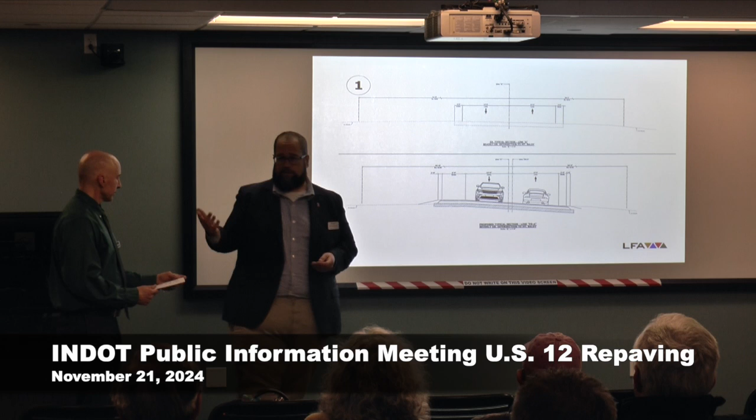So I'm going to stop here, and I'm going to let Dan take over and walk you through the finer points of this. And then again, like I said, the project team will be here as long as we need to at the end of the night. So Dan, okay. All right, thank you, Adam. Yes, my name is Dan Noguero. I'm with Lawson Fisher Associates. I'm the project manager. We are the designers for this project, so we appreciate the opportunity to come out here. Most of you have already looked at most of this, so this will make it pretty clean to understand, hopefully.

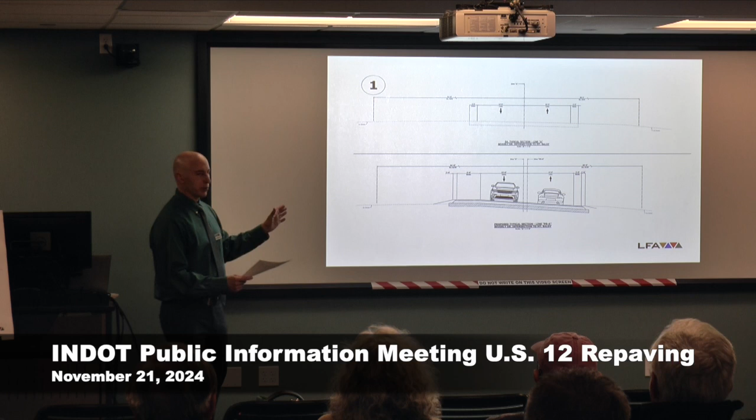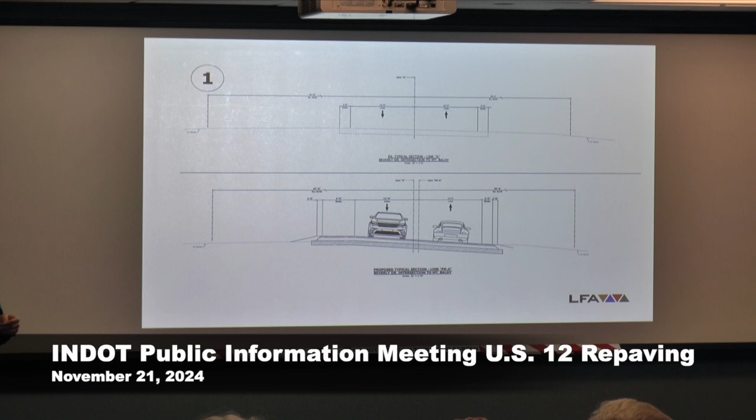So while this is designated as a pavement project, there are some activities that are technically not pavement. So in addition to addressing the pavement, the US 12 corridor as a whole is receiving improvements. Lane configuration and drainage improvements are the most significant and will be highlighted in this presentation. The next 20 slides are the same plan prints that are lying on tables along the sidewall and at the back of the room. The first 4 slides are displays of traffic lane conditions and proposed changes. The top images of each are the existing conditions, and the bottom image is the proposed condition.

The 4 section slides will be revealed from west to east along the project. Projects are typically laid out from west to east from beginning to end. The project begins on the county line west and ends at the state line east. This particular section is the horizontal curve at the west end of the project at the Beverly Drive intersection. A 6-foot shoulder is proposed on the north side for bicycles for connection from the National Park to Beverly Shores.

The reconstructed road will be super elevated, or sloped or banked, with both lanes. The existing condition is the dashed line underneath. It's a flatter condition; the super elevated road will be banked. While the existing road is super elevated, it's not fully super elevated as desired due to the 2 Beverly Drive connecting roads. And I will speak on that more in a few minutes.

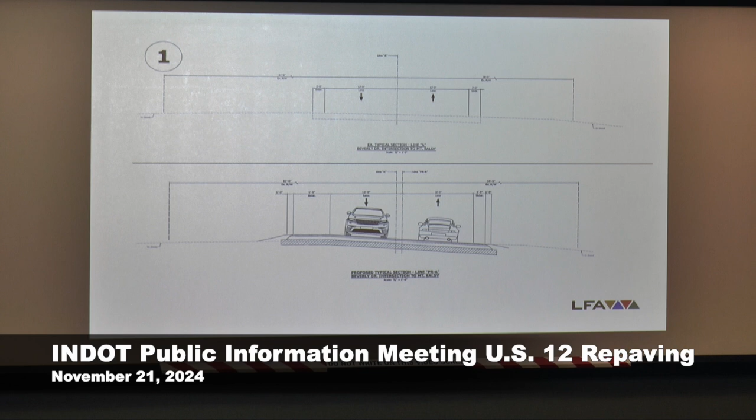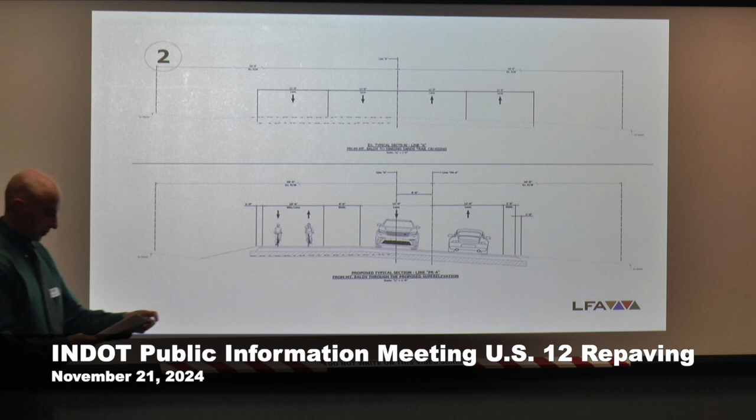This section is just east of the one just shown. This is where the 2 lanes around the curve open up to 4 existing lanes. The current proposal is to hold the 2 lanes from the west and not have 4 lanes. A bicycle lane is on the north side for connection to the national park. Again, the roadway is super elevated from the existing, which is flatter, super elevated and banked through the curve with new pavement. The existing road is not super elevated here. The lanes are also shifted to the south as part of the new alignment.

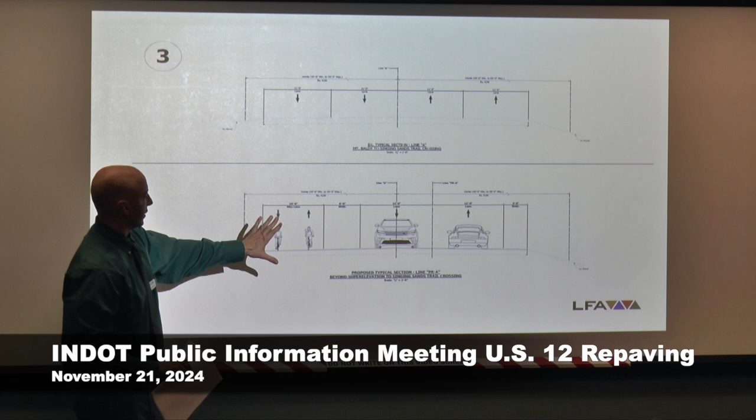This section is again just east of the one shown. This is similar to the previous slide with a 10-foot bike lane and 2 vehicular travel lanes. Well, this is proposed from Mount Baldy approach to the Singing Sands Trail to connect the trail to the national park. One thing to note about this condition is the reuse of the existing pavement. There is no new pavement in this area. The plan is to right size the corridor using the existing pavement to reconfigure lane assignments. So you have a 44-foot existing roadway. It's still going to be 44 feet. You're just going to have a 10-foot lane, some buffer, travel lanes, and a shoulder.

We also have the easels here to my right, your left, that will show the sections just discussed and connect them to the plans as we move through the project limits.

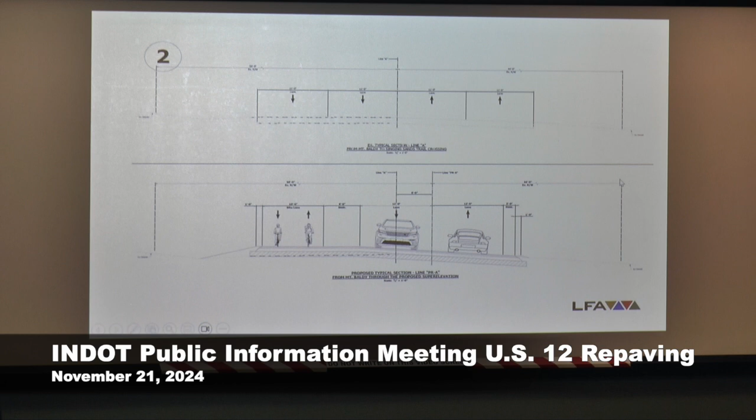Can I ask a question while you're doing that? There we go. Okay. It's working now. Back in business. My tech guy. All right, very good. Thank you.

All right, before we work through the project from the west limit to the east limit. Sorry, there was a question? Do bike lanes have to be in traffic? Can't they be separate and safer, like through the wooded area, away from traffic? They can be. In this case, they're reusing the existing road to try and get the 4 lanes down to 2, so there's still adequate space. There is a buffer between.

Bikes are not consistent like cars are, and now they're cutting down car lanes for something that might not even hardly get used. Yes, the plan is to reuse the existing pavement. The desire is to get down to 2 lanes, since you have that adequate space to connect from the Singing Sands Trail to Mount Baldy. It seemed to make sense to use that space for a bike lane.

Yeah, I understand that whole trail thing is nice. I just don't like bike lanes when they're in traffic and you're trying to turn right and then all of a sudden a bike comes up next to you and they don't stop at stop signs and follow traffic rules. Yes, we can walk through there; there wouldn't be any right turns along this stretch that we're talking about.

No, for me, like in Michigan City right now where you've got bike lanes and I want to turn right, but there's a bike lane and all of a sudden somebody will come whipping through the stop sign on a bike, and you're trying to turn right after you just stopped. You know, stuff like that happens. Yes. I don't have a solution for that. We can chat a little bit more about that after.

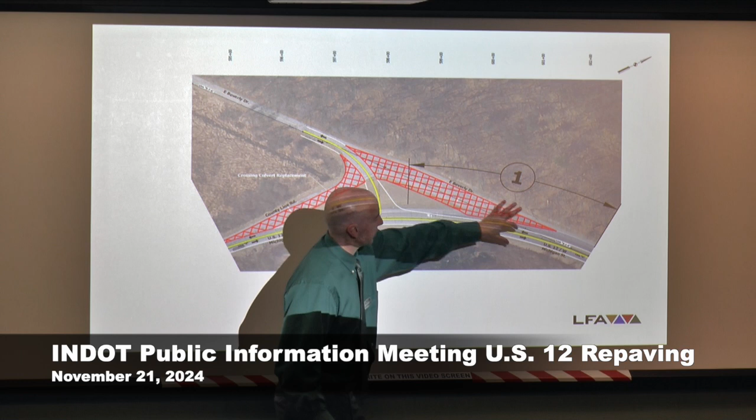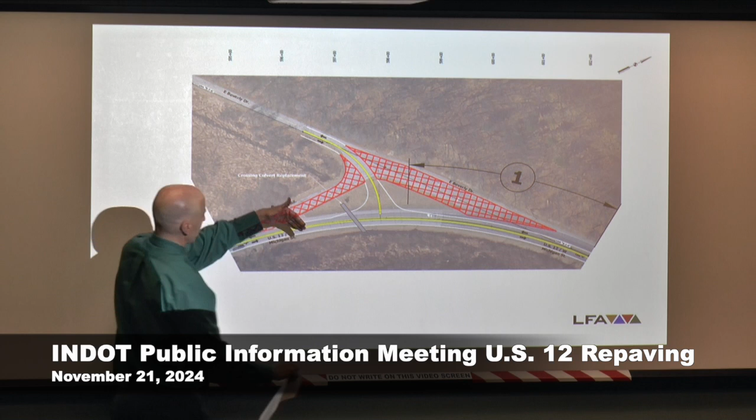Another thing is this is very flat through here because the 2 lanes extend. This is not superelevated the way it needs to be. So part of this improvement is to superelevate the road all the way through the horizontal curve, which is not what it is now. It's superelevated between these, but it really should be superelevated all the way through the curve.

So, I was wondering, will there be a stop sign there for Beverly Drive? Yes, there will be a stop sign. How about 12? 12 won't have a stop sign. 12 will still have the through condition. Sure.

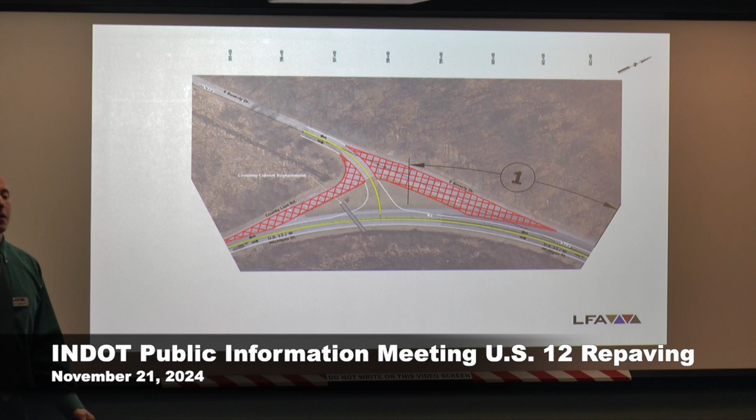It's already super elevated. Is the speed limit going to be reduced? Because when you're coming around that curve, how quickly are you going to have eyes on that intersection? I think the speed limit is probably 40 right now, and everybody does more than that. No, I think it's 50. Right, which is quite a clip.

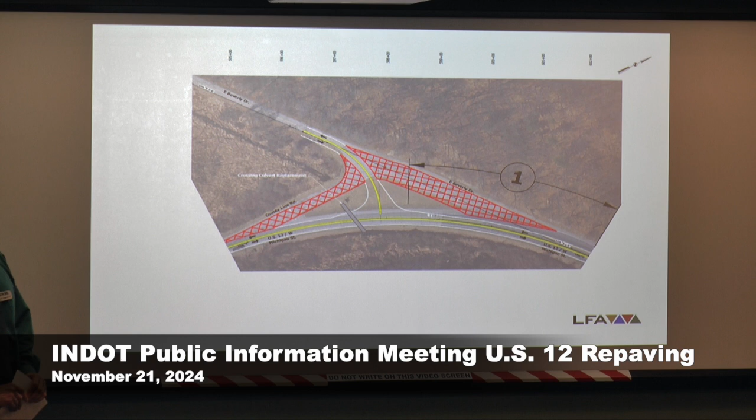If you're coming around a curve and all of a sudden you see a car sitting there waiting to turn, is it going to be reduced? Is that part of your plan? Speed reduction is not part of the project. I think it's 45. It is 40, I believe it is.

Well, what I will say though, right, Dan, is taking it down, choking it down, has a way of slowing down traffic. By force. I know. Like 12 and Sandville. You understand what I'm saying? So it's just kind of natural.

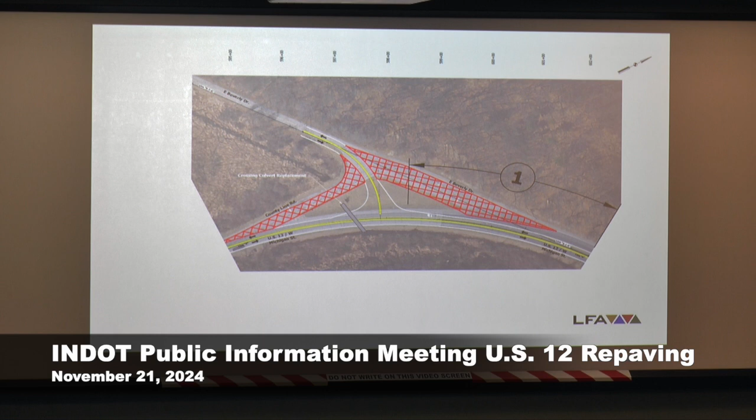All right. Another item to note here is there's going to be a crossing culvert replacement in the area. See the gray box? There's an existing structure here. The plan is to put a new structure right back in the same location. Because of the extensive reconstruction in this triangular area, the location will be closed to traffic during construction. Detours will be provided to reroute traffic. This plan sheet is laid out at the back table if you'd like to get a closer look after the presentation.

Now we're going to work through the entire 8.1 miles of the project from the county line to the state line. The project begins east and south of the horizontal curve at Beverly Drive. Because of how the road curves, we had to get creative in how we fit US 12 on the rectangular plan sheets. This is why we had the Beverly Drive intersection on its own sheet. It cannot be seen very well on this sheet because of the horizontal curve, so that's why we have the second one. You have to see it with the curve.

Section 1, again, has a 6-foot outside shoulder and the improved super elevated roadway. The Mount Baldy approach separates sections 1 and 2. The bike lane kicks in east of Mount Baldy, and then section 2 carries through the super elevation. Section 3 has the bike lane and the 2 lanes, with the bike lane on the north side. The Singing Sands Trail separates sections 3 and 4, and the 2-way left turn lane starts east of Singing Sands Trail, with 2 through lanes, as opposed to the existing condition of 4 lanes.

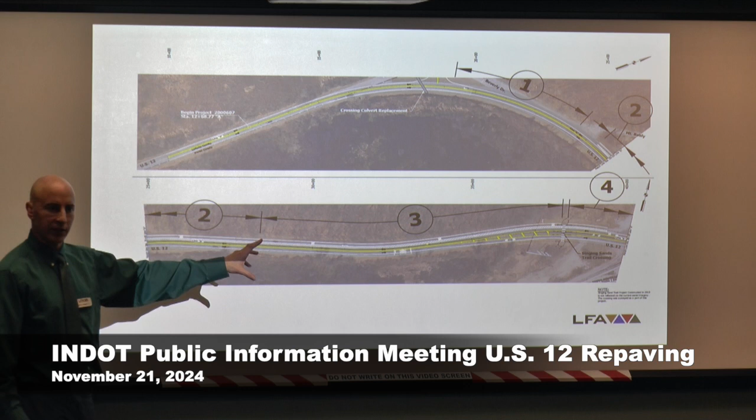And then the Singing Sands Trail crossing is going to be maintained, where it has the flashing light and the median in the middle. That's going to be maintained, but again, it's going to be single lanes around that, as opposed to 2 in each direction, the way it is now.

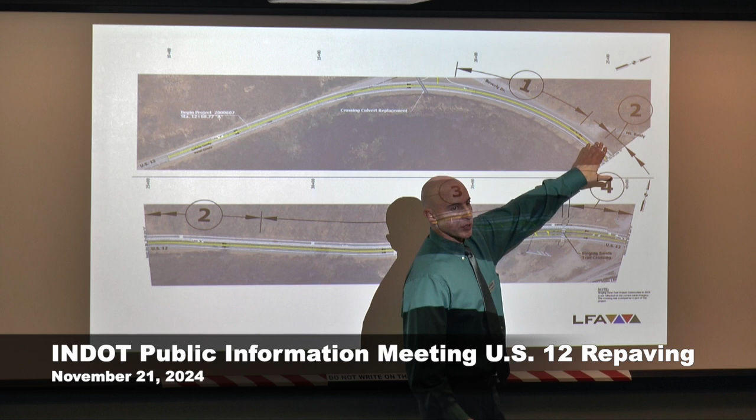Do you have a road crossing from the entranceway to Mount Baldy to the bike trail? A road crossing? A pedestrian crossing? Not a pedestrian crossing. There's the approach to Mount Baldy, but it will be paved to allow the bikes to transition from the bike lane across it into that shoulder.

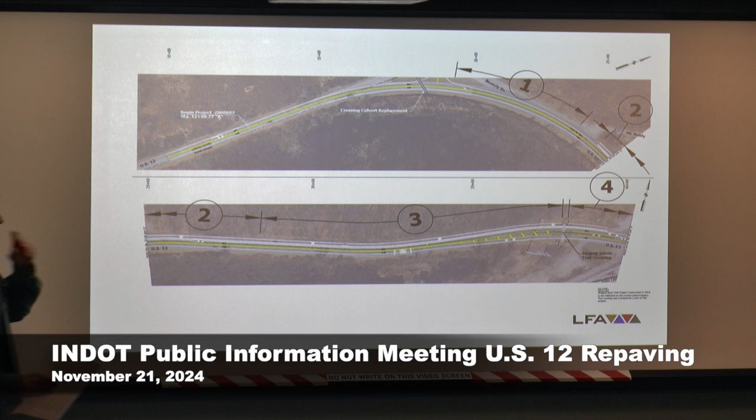All right, the 2-way left turn lane continues from the railroad tracks through the residential area. Hey, Dan, can you go back just a minute and show where the Singing Sands Trail crosses there? The Singing Sands Trail. It's crossing right there. Thank you.

Again, the 2-way left turn instead of the 4; in this case, the 4 is going to be that 2-way left turn lane. So you'll see a lot of that 4, the 2-way left turn lane. So single lanes on this. Now, the 2-way left turn lane continues from the railroad tracks through the residential area.

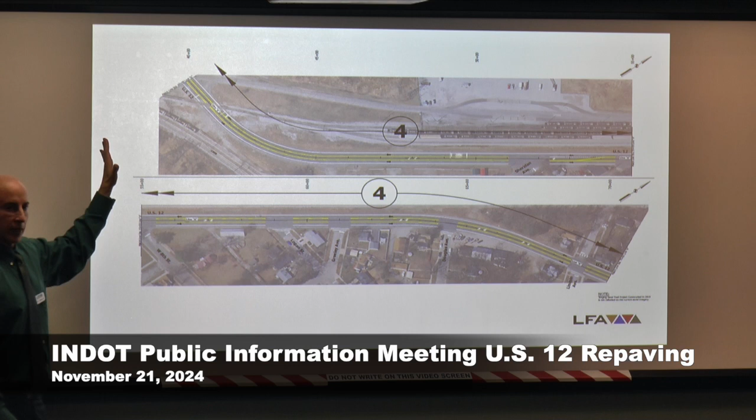Again, when you're looking at these sheets, it's going to be upper left, across here, and then jumps over to this. So you're looking across from the top left to right, and then on the bottom it's going to be left to right. And when this sheet ends, the very next sheet goes back up. So when those are laid out, you're looking across left to right, top to bottom.

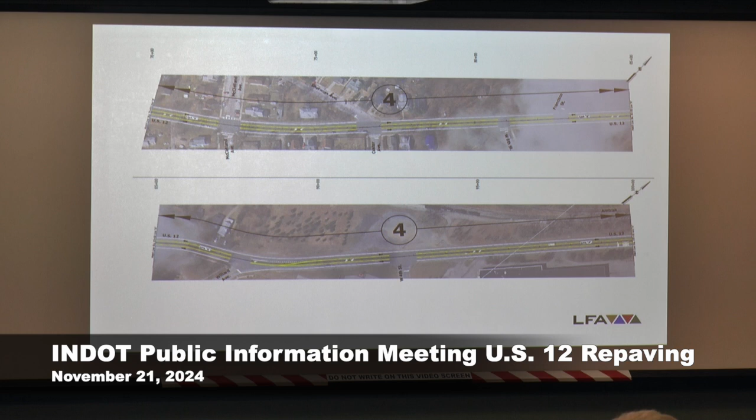Again, the two-way left turn lane continues, and in these areas this is where the ADA curb ramp improvements will be done along the existing sidewalk that stops at the side streets. This is done throughout the corridor where curb ramps are present.

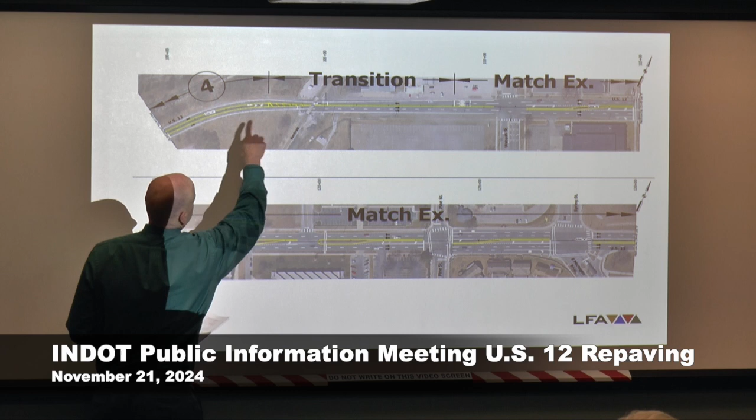Now here is where the west proposed two-way left turn lane ends with the Amtrak railroad crossing west of downtown. There's a transition from the two lanes west of the tracks to the existing condition at Wabash Street. Through downtown, the existing conditions are maintained. So you see match existing; the lane configurations, how they are now is what it's going to be after.

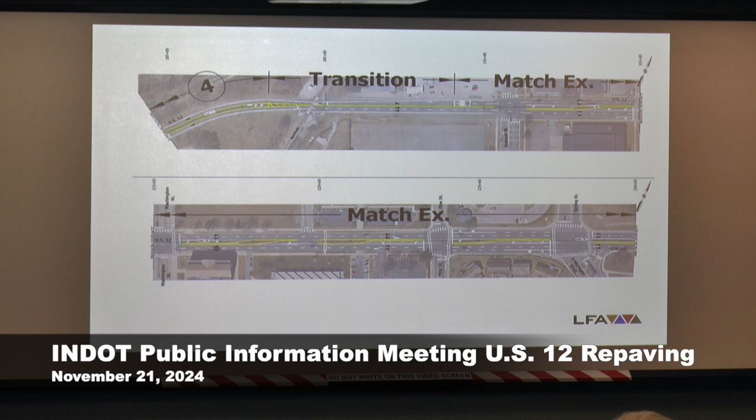There's still going to be construction here. There'll be paving and patching and resurfacing. So there'll still be work, but the lane configurations will go back as they are now. Again, the existing conditions are maintained as far as lane configurations are concerned. The pavement will be milled and resurfaced and restriped.

The pavement will be addressed the entire 8.1 miles, except for right here at the bridge, east of downtown. Bridges do not receive the same mill and resurface as roadways. The existing bridge is in good condition and is not part of the project.

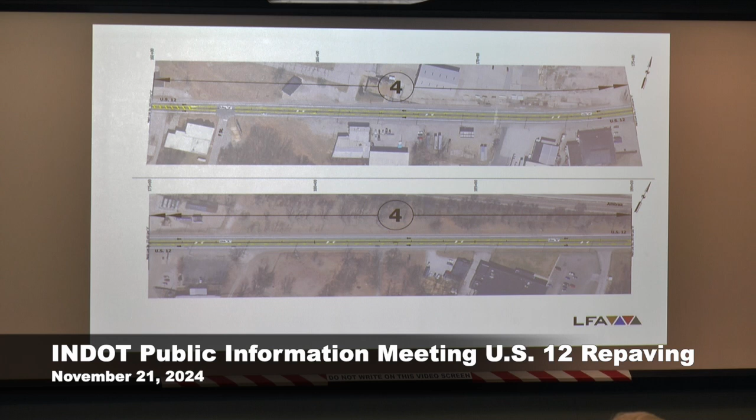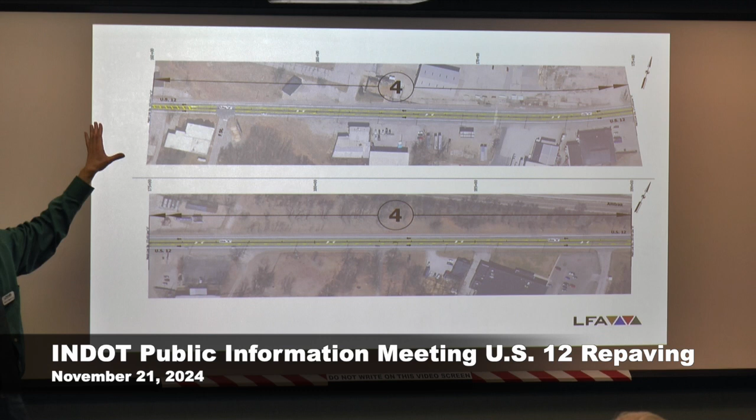To the east of the casino at F Street, the two-way left turn lane reappears. So now we have the two-way left turn lane showing back up on the east side with two through lanes instead of four. This is the situation where, in the four lanes here, we're going to hold the two lanes that go by the casino and keep those two lanes going to the east.

I have a question. Yes. At Liberty Trail, would you consider making left turn lights from both directions? There's quite a few people that turn left at Liberty Trail. That's part of the intersection modernization, because there's a different configuration there with the left turns. That will be part of the new poles, the new traffic signals, the new timing, yes. Okay, that's great. Yes, the protected left. Good.

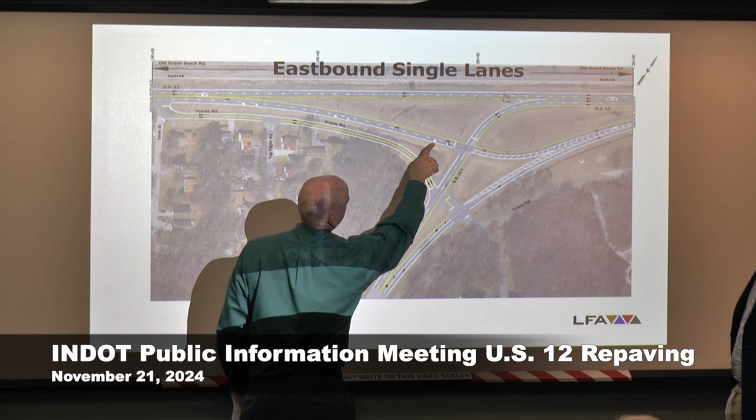So you said, not the straight one, but the one kind of curving at the top, that's going to be one way going towards New Buffalo, one lane, period? This one will be a single lane. So what if you need to go right, but you forgot to turn right back there at the very beginning of that picture? If you forgot to turn right here? Yeah. Well, there's a right turn option here. You can still turn right there. Is that the question? Yeah, okay. If you miss this turn, yes, you can still turn right here. Okay. Now you're going to stop in the traffic because it's only...

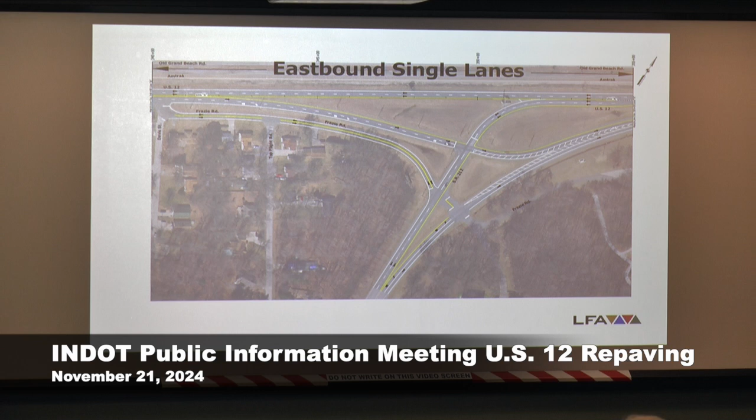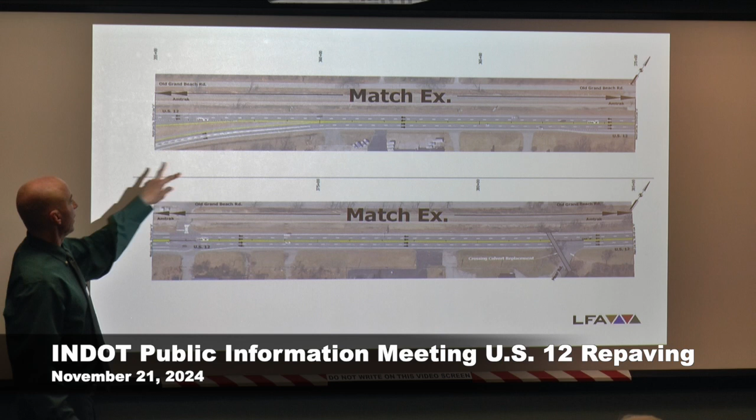Again, here's where you can show where there would have been potentially four lanes before. Now you've just got two lanes coming and going into the two lanes, less likely to be converging on each other. Four lanes down to two, going right into their lanes. Beyond the State Road 212 intersection, the lanes match existing. There is another drainage structure, a crossing culvert, that is proposed to be replaced at Muir Road.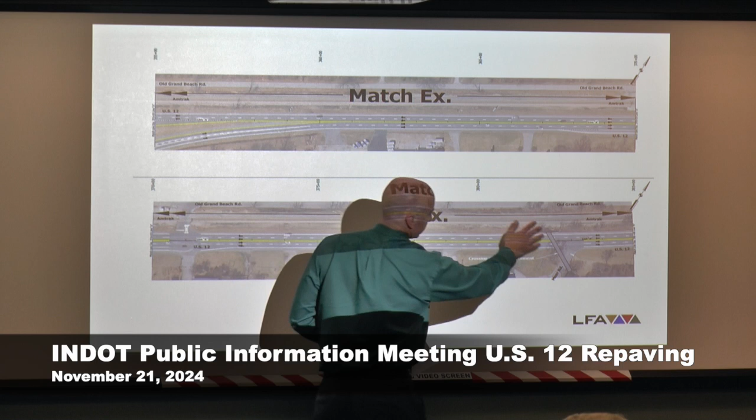Here. There is an existing culvert that will be replaced by an 11-foot by 10-foot box culvert, so very large. This will again close US 12 for reconstruction. Traffic will be rerouted with detours.

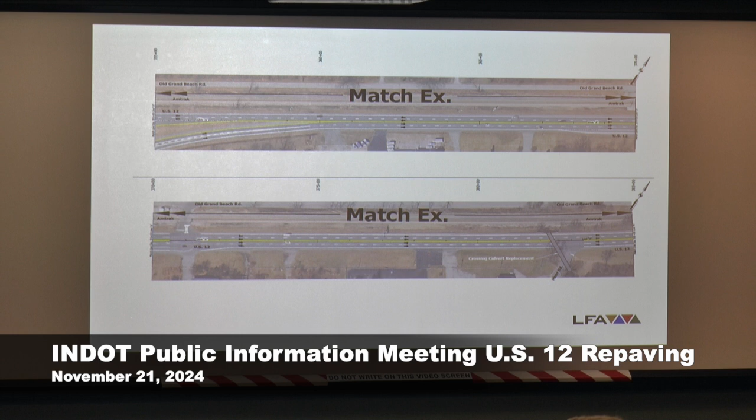There are also half a dozen or so small diameter crossing pipes that will be replaced at various points on the east end of the project. The plan would be to coincide those replacements at the same time as the large box culvert, but the replacements would be staggered so that if there was a replacement here and here, these people would be trapped. So there'll always be access in and out, but we would like to stage them at the same time as the large closure for the big structure.

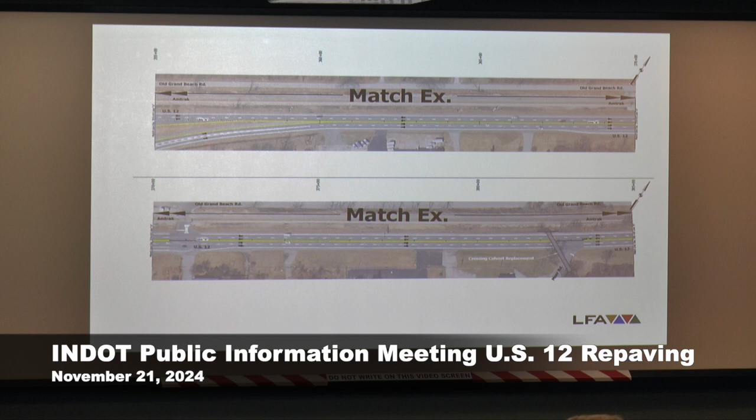Again, we are matching existing east of Muir Road. And finally, matching existing at the project end, at the state line with Michigan. This is the final area slide display. Again, these prints are laid out on the tables for closer viewing. Personnel will be on the other side of the tables to answer any questions you may have.

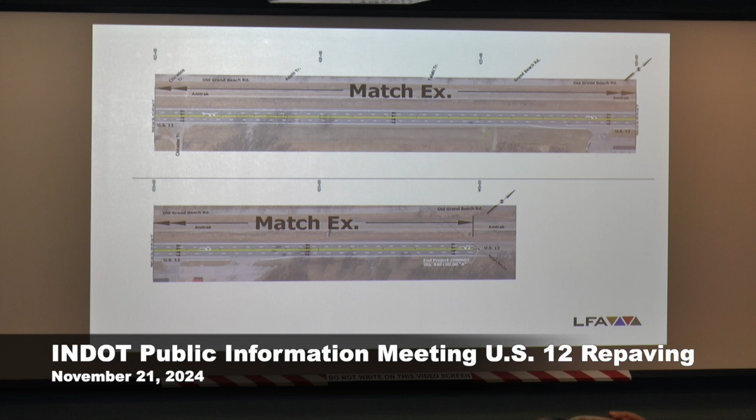Pass it down back to Adam. So that's basically it. As Dan said, we'll hang out here as long as we need to. A little bit about the schedule. Besides the public information meeting, over the next year, we'll continue to develop our environmental document, get that finalized. And then proposed construction will be in 2026. We have some coordination we need to work out with various entities, but hopefully we can keep that on track. And if anybody has any friends with those entities, let us know.